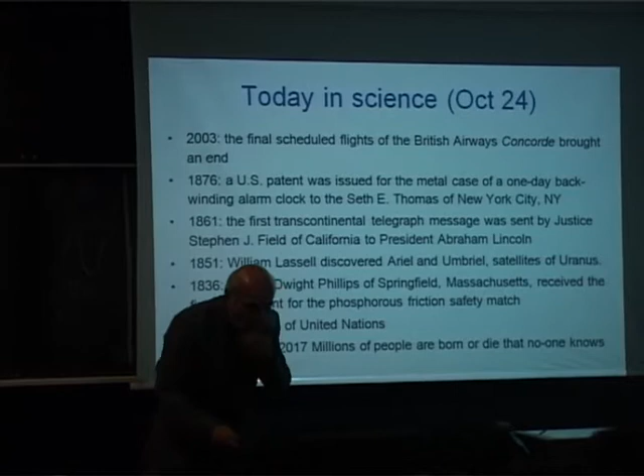So with that, I always would like to bring in a perspective toward any given lecture. And I am reviewing today's history in science, starting from 1945. Today is the day that the United Nations was founded in San Francisco. Then in 1949, it was moved to New York City.

In 1836, you all look at the match, you just make a friction and the light would come in. But you know that fire has been the biggest invention of the human being. And finally, in 1836, a patent was given for a new match. So what you see is millions of years of history behind something so simple. That is the heart of science. Once you understand everything so simple that you can explain it to a 5-year-old, then that is science.

In 1851, two of the satellites of Uranus were discovered, and they were named Ariel and Umbriel. Do you know the origin of these names? They come from Shakespearean characters, Ariel and Umbriel.

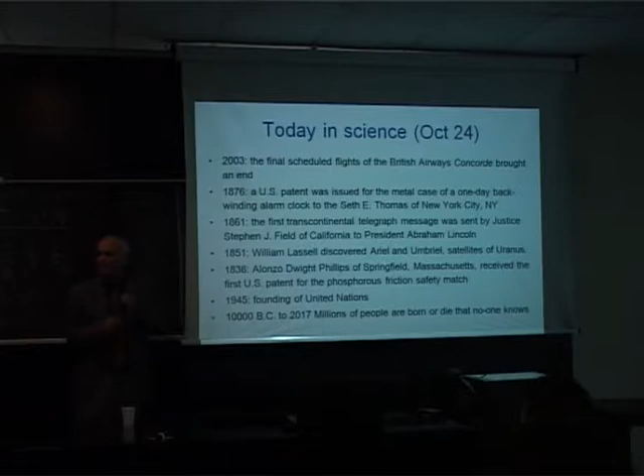Having said all of that, to me the most important factor is the last item. Today, like any other day, is a day that millions of people have died and been born, and nobody knows about it. As engineers, it is our responsibility to be worried about these people. History is the life of these people — this is not history, these are only some highlights of the history. So, everything that we are doing as environmentalists, we are trying to improve our life a little bit better. Many of us are never going to be recognized. That's fine. We are part of millions of people.

Okay, so with that I'm going to now jump into the science. There is a terminology known as urban heat island. A heat island is given to cities because downtown areas are warmer than suburban areas. You all know that during the summer, most people go on vacation in a rural area because it's typically in the mountains, a better climate. So urban heat islands, which are typically higher temperatures, have consequences: as the temperature increases, the demand for air conditioning in commercial buildings and some new residential buildings increases.

As an example, in Southern California, in the Los Angeles Department of Water and Power, the demand for electricity increases from 10 gigawatts to about 16 gigawatts for an interval of 10 degrees higher in temperature.

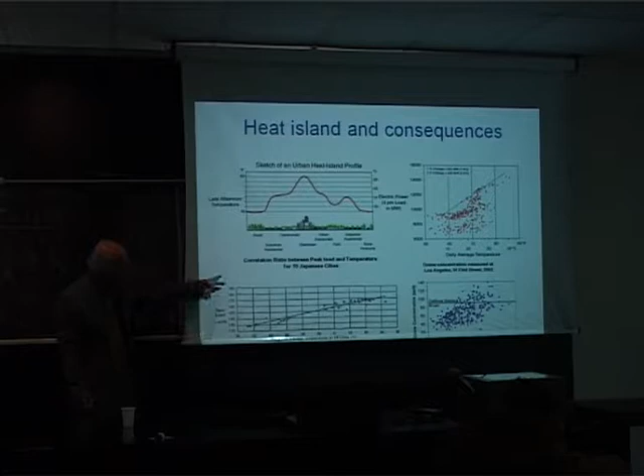Man-made conditions have created a need for air conditioning. Air conditioning costs money and environmental health, contributing to global warming, and there are ways we can avoid some of that. For example, in the Tokyo area, for every degree higher urban temperature, you need an additional 5 gigawatts of power. A gigawatt is 1 billion watts, and each gigawatt of power costs around $2 billion. So each degree Celsius increase in temperature costs an investment of $10 billion.

It's a lot of money. In addition, as the temperature increases, the air quality decreases. The plot on the lower right shows the concentration of smog ozone. When the temperature is around 25 degrees, the ozone concentration is below the California standard requirement, but once temperature increases from 25 to 35, basically all days become smoggy.

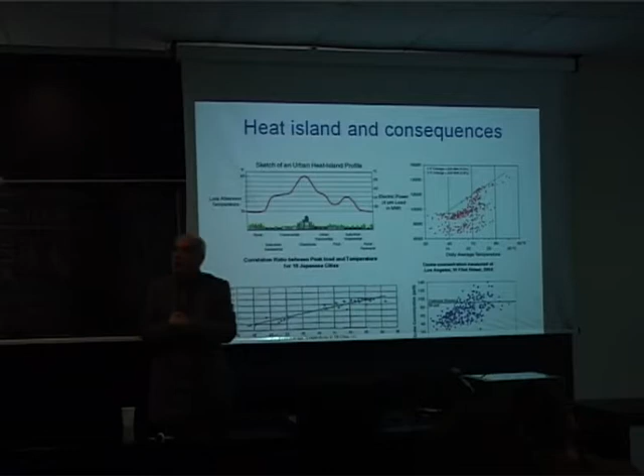So now we're talking about a heat island, which is a man-made effect that causes additional energy use, urban air quality issues, and if buildings aren't conditioned, health and comfort issues for citizens. So what is a heat island? Looking at an aerial photo of most metropolitan areas, you see two dominant surfaces: roofs and pavements.

Roofs, pavements - what is a roof? It's a man-made factor. What is a pavement? It's a man-made structure. So we can manage these things properly because we build and maintain them regularly. If we do it correctly, it would improve our environmental condition. And by the way, this is the case basically everywhere you go around the world.

Now here is another factor. This is August 2003 - a heat storm came to Europe. Some of you may not be old enough to remember that. Italy and France were the major victims of this heat wave. Over 50,000 people had an early death. You know, everybody is born one day and dies another day - statistics are perfect, there's no question on that. But they died prematurely; the time was not there for them to die.

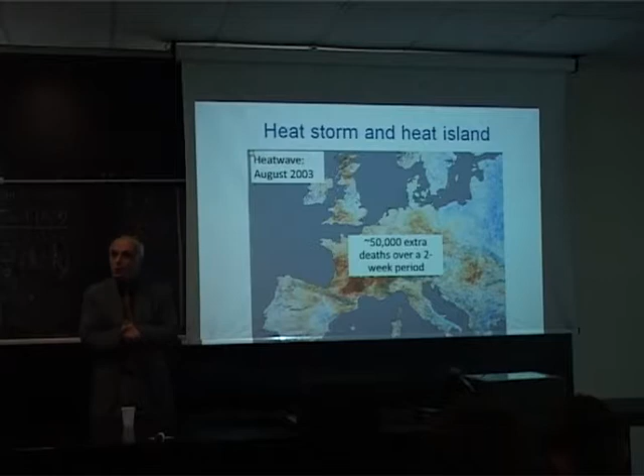They died because of the heat storm. Now, the value of human life matters - it doesn't matter whether that person is living in Europe or living in Africa. So improving the living conditions of humans is very important to us.

So here is how the process works. Solutions for heat island mitigation are typically cooler roofs and urban vegetation. A cooler roof would reduce air conditioning energy use. Lower air conditioning would require less power. Less power would require less fuel to be burned. Less fuel burned means fewer emissions, so air quality would be better.

Now, if a city or neighborhood has plenty of cool roofs, plenty of vegetation, plenty of cool pavements, the entire community is going to be cooler. So if your house happens to be in a cooler community, it would require less air conditioning. On top of that, with a lower ambient temperature, the data show the air quality can improve significantly.

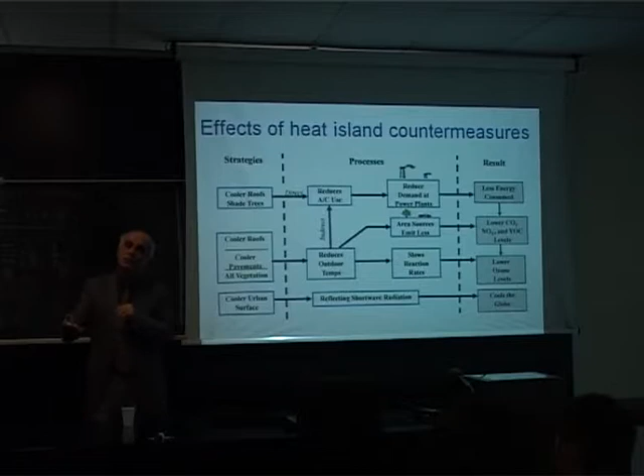So you can define any color you want, with the visible color characteristics you want, but make it 100% reflective in the near infrared. For example, if you want a jet black surface with a reflectivity of 0 in the visible range, you'd develop a material with reflectivity of 0 in visible, 100% in near infrared. On average, that jet black surface would have a reflectivity of 50%. So is such a thing possible? The answer is yes.

Here is an example of a standard brown and a cool brown that's designed to be cool. If you look at the spectral reflectance on the lower right-hand side, you'll find that in the visible range they are identical.

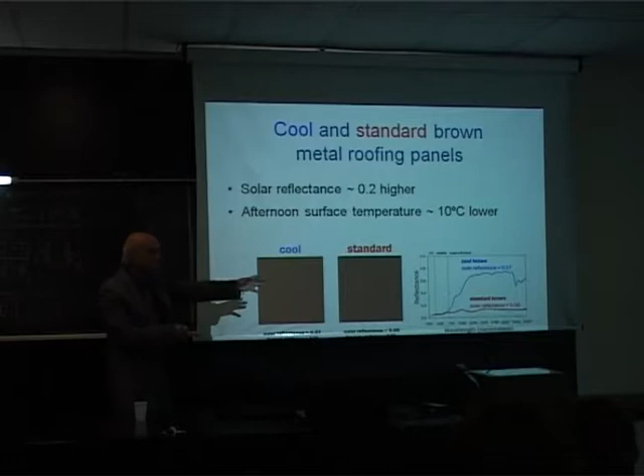Then in the near infrared, you would find out that the cool brown has a reflectivity increasing all the way to 70%, while a standard brown has a reflectivity around 10%. So if you put these in the summer, on the hottest summer day, this surface is 10 degrees cooler than that.

And if you ask people which one is what, without touching it, they would not be able to tell. Actually, there is a true story about this.

I was demonstrating some of this in the U.S. House of Congress. I had a booth demonstrating some of these cool materials, and I had an infrared sensor that would target this and show the temperature. The battery of my infrared sensor died, and I didn't have time to go and get a new battery, and I was not well prepared to have a spare battery.

So many of the House of Representative members that came, the only way for them to understand whether this is cool or hot was to touch it. When they touched it, some of them burned their hand. So it is called a burning impression. Some of the House of Representatives who are supporters of the technology still use that terminology.

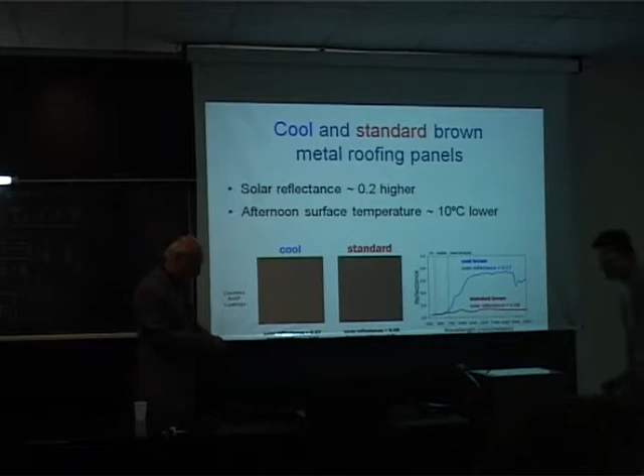You're looking for the, yes. Thank you. Wonderful. So now let us go. This one? How does it go? No. Okay, good.

First option, to be absorbed. Second option, to be reflected. Third option, nothing happened to it, go to the next layer. The same thing happens at the next layer: absorbed, reflected, or nothing happens to it.

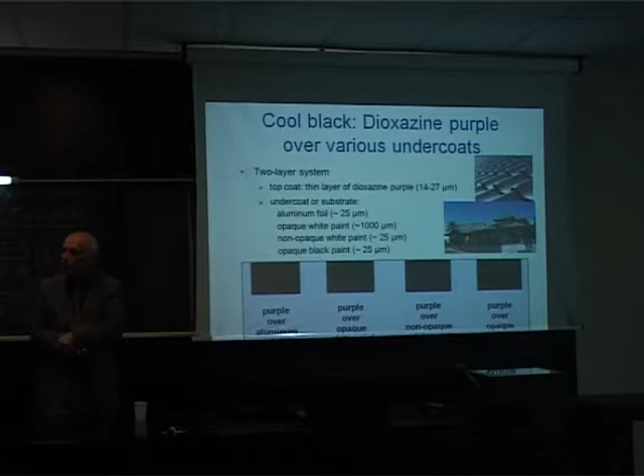And again, as far as the eyes are concerned, they are exactly the same. Now look at their spectral properties. Eyes say that they are exactly the same. But when you look at the properties in the near infrared, you find out that the materials on the metallic and white background have a much higher reflectivity, almost up to 90%.

So when you integrate it all, you find out that the jet black standard has a reflectivity of 5%, but the reflectivity of the engineering material is about over 40%. Remember that a few minutes ago I said you can develop a jet black material with a reflectivity of about 50%. You are already 80% of the way there with some simple ingenuity.

So the question is, doing things at the lab is good, it brings a level of satisfaction, but you get a lot more satisfaction if you see the products in the market. So from the very beginning, in my group, both at Lawrence Berkeley Lab and at Concordia, I have been working directly with industrial partners. Our technology was integrated with their technology. We had a bit of technical, academic background; they had a lot of application background. Together, we made a perfect fit, and products came to the market.

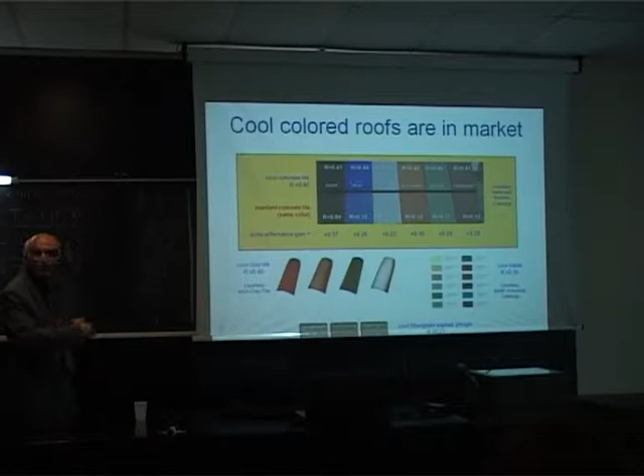So here is an example of standard coatings versus cool colored coatings. A lot of concrete tiles change over time. Oh, thank you, that makes a big difference.

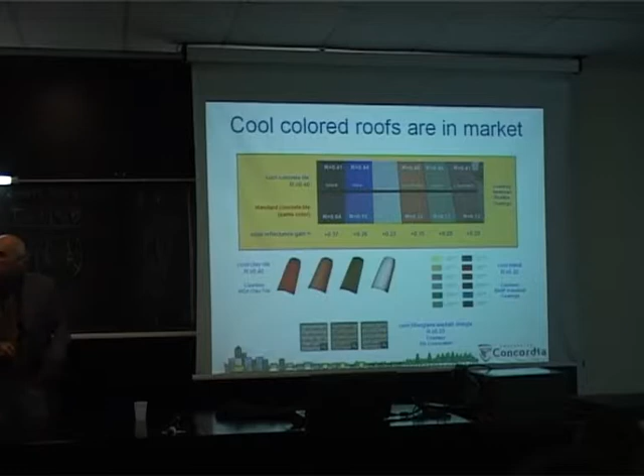So, cool colored materials versus standard coatings: cool colored tiles approaching a reflectivity of about 75%, cool colored metal roofings approaching a very, very high reflectivity, and also fiberglass asphalt shingles, cool colored. These products are available in the market.

Now, newer products are being developed at the lab, and one of those products is what we call latent heat cool white. Basically, this is a sponge rock-like roofing that works very well when there is high pouring of rain in a short time. So flood is a major issue.

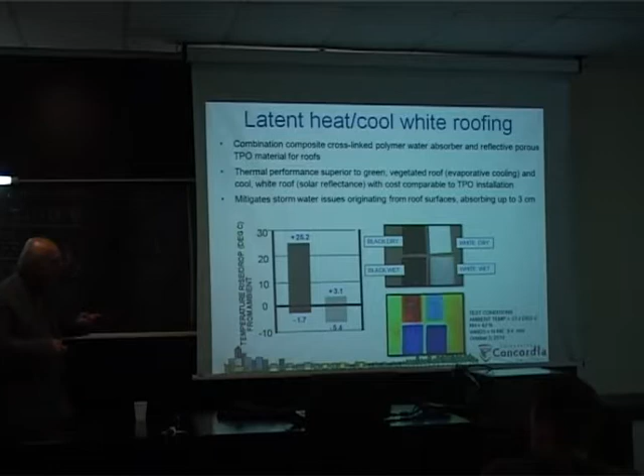In the old days, when the land was not engineered, this water would be absorbed by the ground. But in a development, water from the pavements and roofs runs into the city, and if the rainstorm is very severe, it would cause flood. So this particular material has the capability of absorbing this water, and as a result would reduce or regulate the flow of water from the roof.

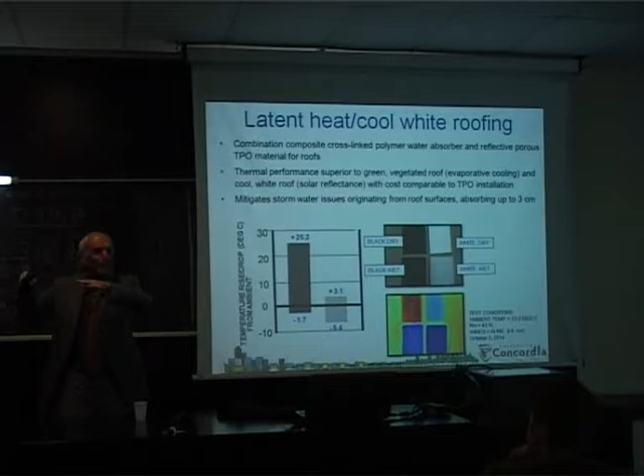But once the water is absorbed on the roof, it would keep the roof cool for a few more days. So this type of product is very useful for tropical ranges.

Here is this product when it is dry. When it becomes wet, this is the thickness of the product, and this is the amount of water that it has absorbed on its roof. Of course, you have to make sure that the structure can hold that additional weight of the water. Otherwise, you are trying to solve the water problem, and the entire roof would collapse. So it is an integrated problem.

Another technology that is again very simple is when you want to have a choice of color and you do not want to invest a lot of material. Another class of material that we are calling directional reflectivity. This is not retroreflective, it is directional reflective.

Consider a roof, a slope roof. People would like to see the color of their choice when they are walking on the streets, but the sun is up there and sees the roof in a different way. So if I see the color that I want, but the sun sees white, I have achieved my objective. Here is the way that this material has been engineered.

Here is an example of that. This material looked at from the ground, and this material looked at by the sun. The reflectivity in this direction is 60%, and the reflectivity in this direction is 20%.

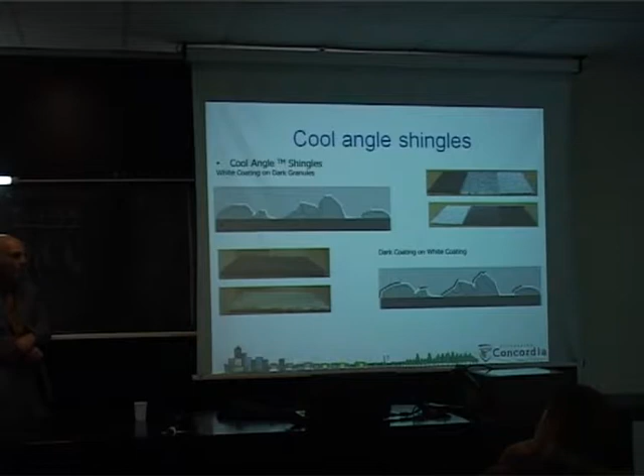So how do you do that? For a granulated surface, you brush the surface in one direction in the color of your choice, or white color. You get your answer immediately, almost at no cost.

So there are ways to engineer this material, not necessarily very expensively. And of course, retroreflective materials, which particularly lend themselves to environments with heavy urban settings.

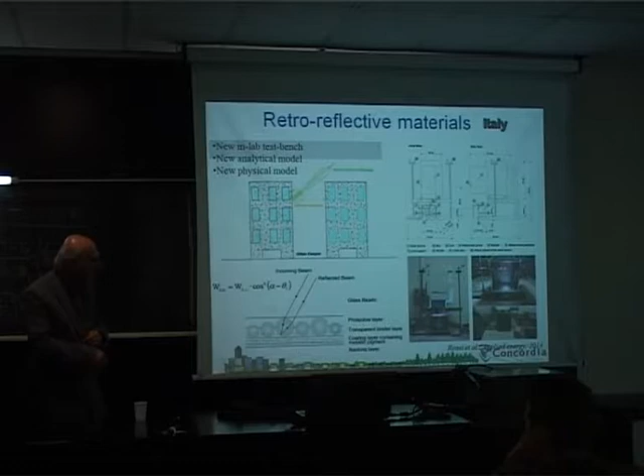When the radiation of the sun is incident on the wall, you do not want that radiation to be reflected through the window of another person. So it would reflect the radiation in the direction that it comes from. In most cases, these materials can be developed by putting hollow spheres into the coating on the top layer, which would reflect the radiation after three bounces in the direction it is coming from.

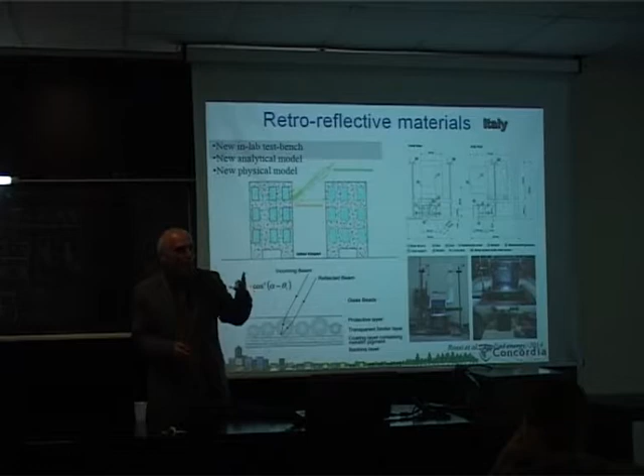These retroreflective materials are the same as when you are driving at night on the freeways, on the autobahns. Their light would come back in the direction of the light of your car.

These materials, when not fluorescent, have a standard reflectance of about 20%. Now, if you make them cool, their reflectance increases from 20% to 40%. Now, if you make them fluorescent, some of the light that is absorbed in the visible range would be emitted in the near infrared range at over 60% reflectance.

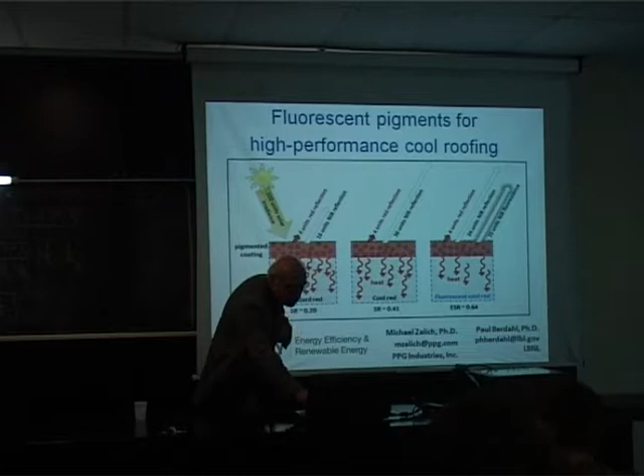Now, when you start something, before you know it, you can see that you can apply your knowledge into an adjacent environment. As an example, a lot of surfaces that we have—you don't have to go a long way, just look around the buildings here. They get dark or black over time.

Windows collect dust. The question here is how I can minimize the deposition of particulate matter on surfaces.

This is called a class of self-cleaning material. It is applied on the roof, applied in an interior shade, applied on a wall, and applied on a car on one side.

Now, does this save energy? I don't know, but let us look at this thing.

In most high-rise buildings, the windows have to be cleaned every 3 to 6 months. It costs typically in the order of $20 per square meter to clean those windows.

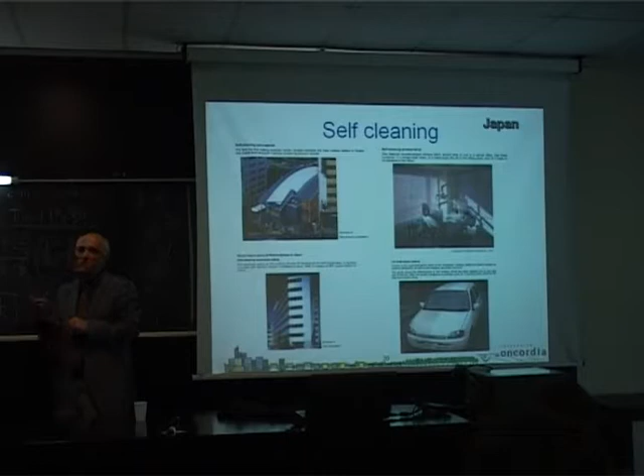Here is another application of this material, being produced or tested by TOTO in Japan. By the way, the Japanese are really leading the application of titanium dioxide in the world. Class A materials are all those tiles treated with titanium dioxide. Class B materials are not treated at all. Again, it tells the story by itself.

Now, the roof typically in an urban setting makes about 25% of the surface area. Pavements in a typical city make about 40% of the urban area. So addressing urban heat islands without mentioning pavements means you have not really achieved the fullest potential.

So the pavements, and understanding how to implement cool pavement technologies, is very important. Even though pavements in most cases are a very simple material, it would be very difficult to implement cool pavements because of different ownership and different applications.

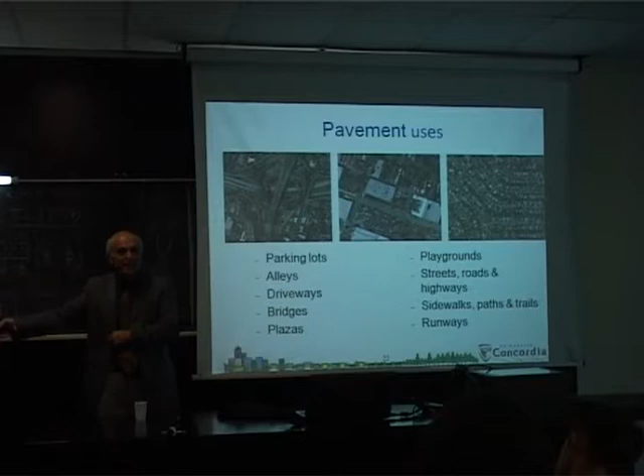But the point here is that addressing all these different materials with different ownership, while the asphalt industry is fighting against you, is not very easy. You have to work with them.

This is called hot mix. Then you spread it on the ground, roll it in, and let it cool down. That's one. The other technology, called chip seal technology, is made out of 2 trucks and a roller.

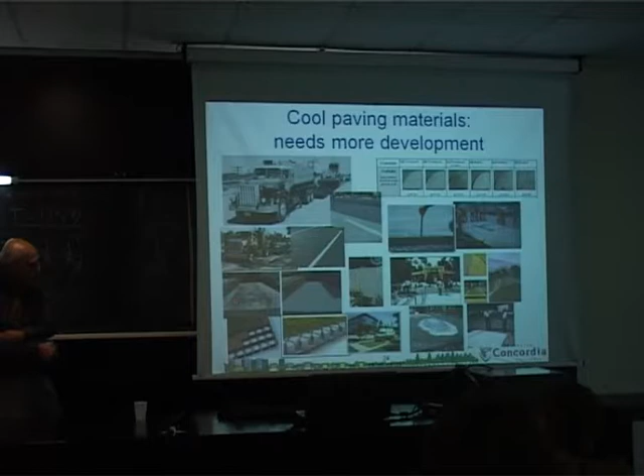Another technology being used is the development of coatings. This is a driveway, the kind typically used in warehouses, where trucks come in and load cargo. Over time, this becomes dirty because of leakage of oil from the trucks, so they resurface it every now and then.

There are products already available for this resurfacing with reflectivity as much as 50%. This has a reflectivity of 50% at a very minimal incremental cost, and in most cases, no incremental cost at all.

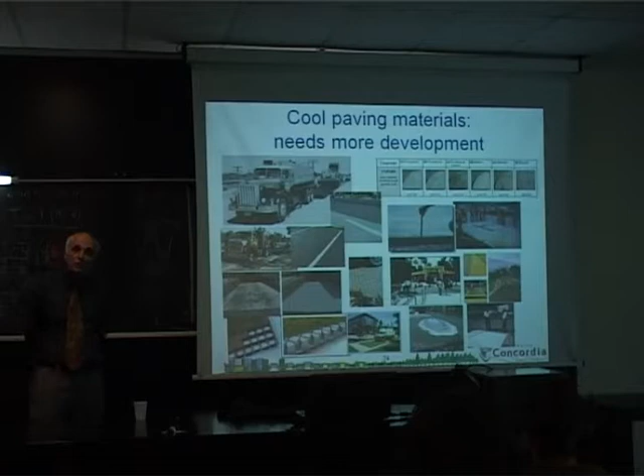In areas with substantial rain, rather than having a solid layer of asphalt, you would have something known as grasscrete. These are lattices of concrete that you let grass grow on. These technologies are being used throughout the world in urban areas—Japan, Singapore, I have also seen some in Italy here and there. There is also porous asphalt, designed to manage flooding in cities.

Now here is the interesting thing about asphalt: the information is coming gradually. There has been a study done looking at the lighting level, the intensity of the lighting, and hence the observation of the pedestrian on these asphalts.

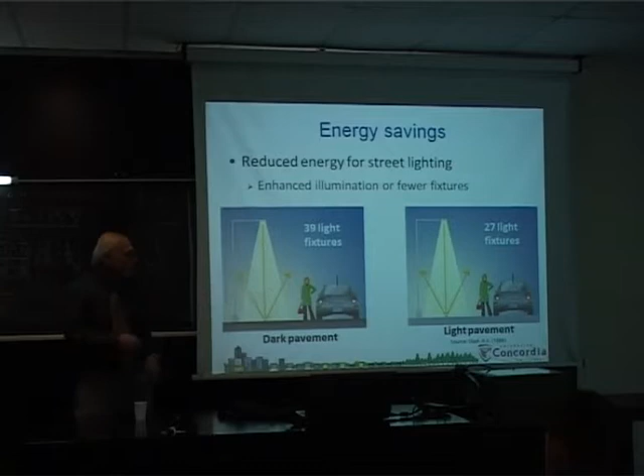One of them is in a dark color, the other in a light pavement. They found that in order to achieve the same level of luminance in the environment, they can have 27 fixtures per mile rather than 39 fixtures per mile. So you have exactly the same level of illumination, but with 12 fewer out of 39 or 40 fixtures—about 30% less lighting.

The source is Stark, 1986—as old as that.

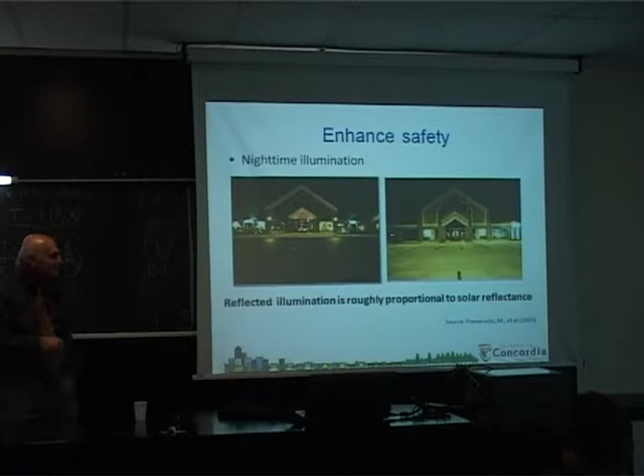Now here is the same pavement measured under the same lighting after being coated in light-colored asphalt. If you are a pedestrian, which one would make you feel safer to walk on—this one or this one? Obviously, if you are walking on the dark one, there is a higher chance of having an accident with an incoming car. On the light one, you would be a lot more visible. So that issue also has to be integrated into the design and use of asphalt.

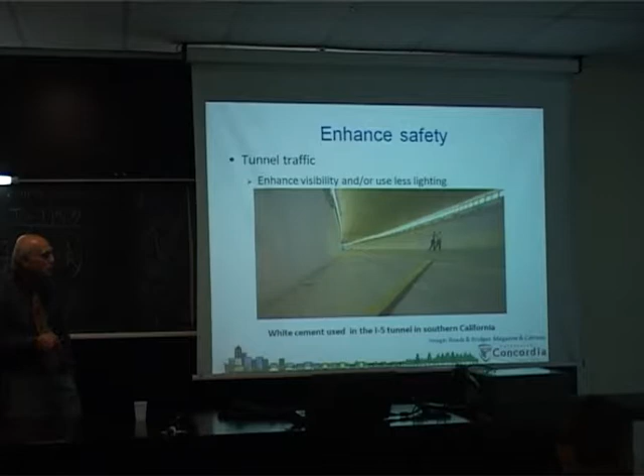Tunnels are all artificially lit. In the United States, most tunnels built as of 50 or 60 years ago are light colored. Unfortunately, I do not know how or why the roof is not light colored, but all their walls and paved surfaces are in lighter color. I have seen many tunnels here and in the rest of Europe that do not follow this simple approach—more lights in a dark environment versus less light with the same illumination in the same environment.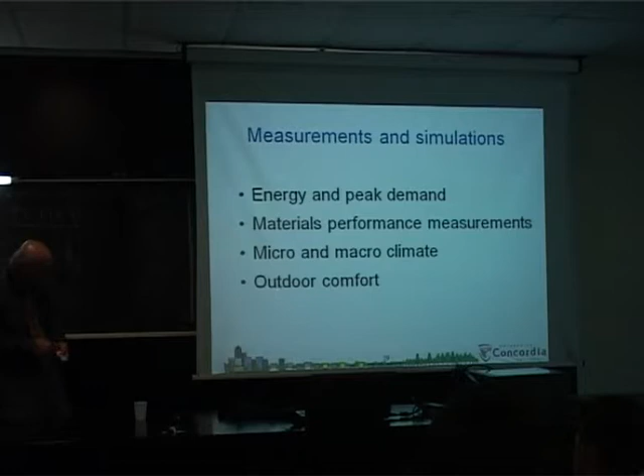A lot of work has been going on, and my colleagues in Italy, France, Greece, Japan, Singapore, India, South Africa, Mexico, Brazil—they are all around the world pushing this technology as it applies in their own communities.

Here is an example of a test that we did. This is very important to policymakers: you take a regular cap sheet roof, monitor its performance, then put a coating on it and continue monitoring. This slide shows when we have half-coated the surface. As you see, the coated part is very cool, the uncoated part is hot, and the seams that are black are the hottest.

When you measure the air conditioning performance of the same building before and after, the weather also changes, so you have to normalize the conditions to compare before and after. When you do that, you find that for a typical single-story building, you save anywhere between 10 to 20% of air conditioning energy use. People immediately understand and absorb that. A 10% savings is typically on the order of about $1 per square meter per year. A roof lasting 20 years—that's $20 per square meter, which is typically about the cost of the roof itself.

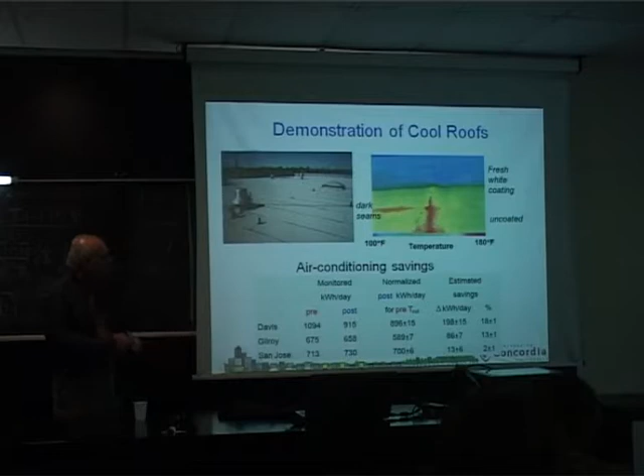So people understand that. When such information becomes available, rule-making bodies such as California Title 24, the European Energy Conservation Code, and the International Energy Conservation Code start using these technologies as requirements for the design of buildings.

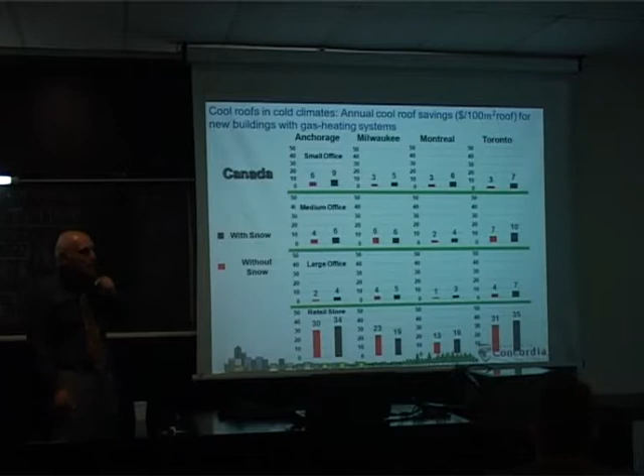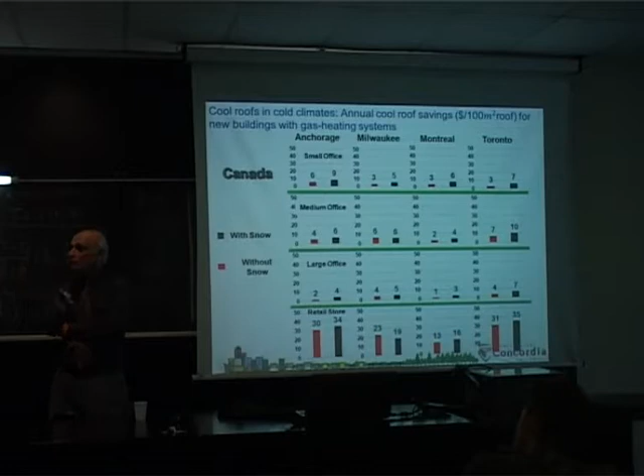This is something a lot of people question, and it's actually a myth. A lot of uneducated people think that if cool roofs are good during the summer, then hot roofs should be good during the winter. But let's think about the difference between summer and winter. When you're talking about winter, in most climates that means no sun—so a dark roof and a white roof would perform the same when there is no sun.

How do you see that? Take it during the night. Take two samples when there is no light, one white and one black. Look at them in the pure dark. You would not see any difference because there is no sun.

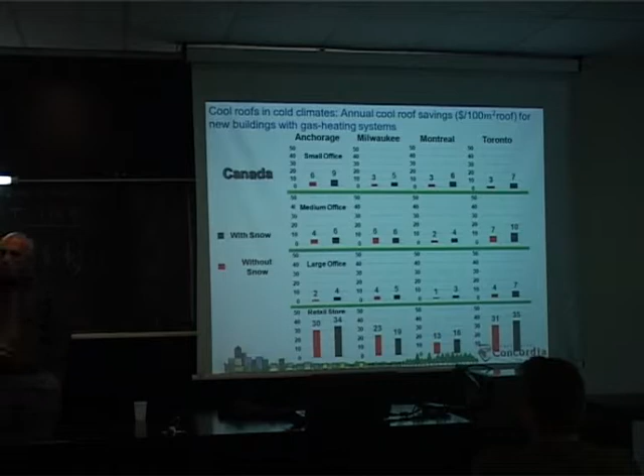That is the situation that we, even though it is so observable, had to do a lot of analysis to show people. In 4 cold climates—Anchorage, Milwaukee, Montreal, and Toronto—we compared the performance of a cool roof on an air conditioned building, and there is a net savings in all those cold climates. This didn't even account for the impact of snow accumulating on the roof. If snow accumulates, it doesn't matter whether it's black or white underneath—they perform the same. So once you account for that, the savings are even higher.

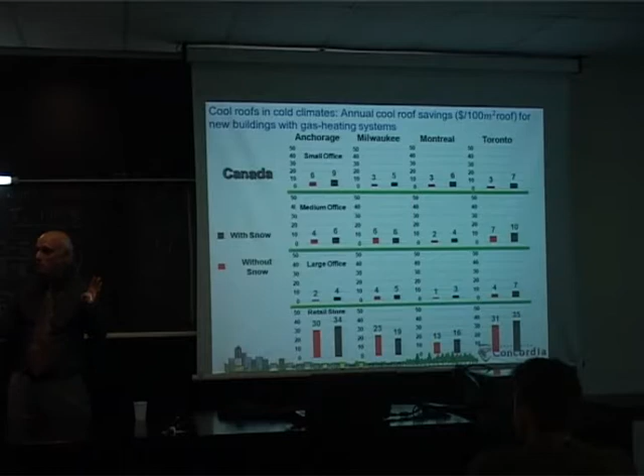So here is the first rule of thumb: anywhere that air conditioning is needed during the summer, for most applications, having a cool roof would save you money. There are exceptions, but those exceptions are very, very few.

Now I'm going to go a little faster so I'm not boring you too much. The impact on a particular building is very easy to demonstrate—you can put a sample, change its color, and with an infrared gun immediately see the temperature difference. But looking at air quality and climate, which happens at a much larger scale, it is very hard to design an experiment to do that. It is costly, and the environmental variables are so many that you would never find two similar conditions to compare before and after.

For that, you develop models that can account for those factors, such as meteorological models. By changing the reflectivity of surfaces, you increase the reflected radiation, reduce the surface temperature, and then reduce the ambient temperature. The same with vegetation—through evapotranspiration it cools the air temperature, increases surface roughness, absorbs some air pollutants, but also emits its own emissions. When you put all of these things together, it's a highly complicated factor.

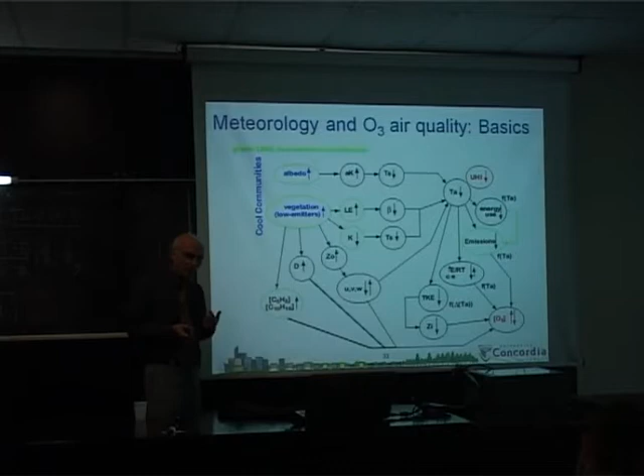So we have been doing research in this area for the last 40 years. We started—first of all, we are not climatologists. We use the models and apply them to our conditions. But we are also smart enough that if a model is not sufficient for what we want to do, we make slight modifications to it. That has been the focus of our research over the last 40 years.

The models we started with were the Colorado State University mesoscale model. Then we went to MM5, and after about 10 years with MM5, we moved to WRF, the Weather Research and Forecasting Model. Now most people around the world use these models.

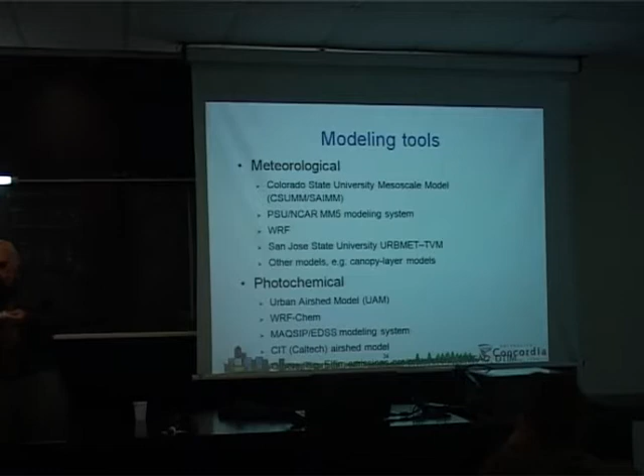For photochemical models, we had quite a few, but right now there are 2 state-of-the-art models used. Most people look at WRF-Chem, but some also use the model that Caltech uses. Professor Seinfeld at Caltech developed CIT, and he's the only user, but since he is an authority in this field, he uses his model and only his model to talk to others. If you are talking to an authority, you have to come to terms with that.

That's the model. So the principles behind these models are very simple. This is actually one of my favorite slides. As engineers, we do not deal with many principles—we only have something like 5 principles that we apply basically to everything. One of those is conservation principles.

So you have conservation of mass as the first one, conservation of energy, conservation of momentum, conservation of water mass, and conservation of energy on the surface. You would say you have a finite number of grids over a domain, divide it into those regions, and apply these conservation equations in a finite difference scheme to solve them.

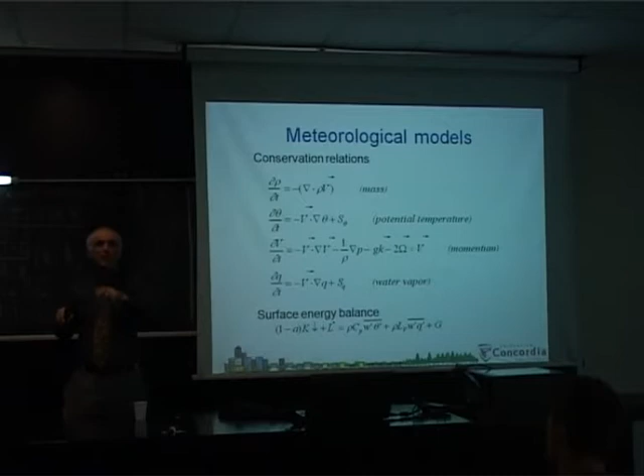Do you understand what a finite difference scheme is? How many of you understand finite difference? One, two—okay, so for you there's a problem, you should go on. So divide this group into 3 groups, and you tell them what finite difference is.

Now here is the point: you have to solve a series of 200 partial differential equations simultaneously, and stability of your solutions is a major issue. Typically, even with supercomputers, to model 1 hour of actual weather you need at minimum 30 minutes of simulation. So if you want to run a simulation for 1 year, it would take your supercomputer half a year to do that—who can afford that? So the way you do this kind of simulation is you only simulate a few days in a month, or a few hot days or cold days, in order to document your principles.

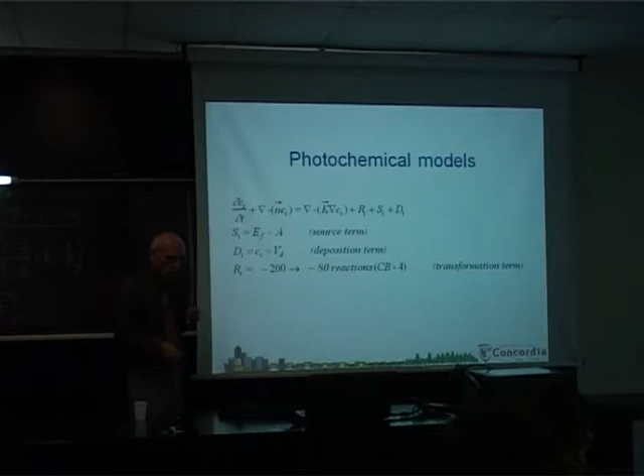Here is an example of such analysis that we have done for a few days. We planted 11 million trees in the Los Angeles basin, and we simulated the temperature reduction as much as 3.5 degrees Celsius, but on average about 2 degrees Celsius throughout the entire Los Angeles.

We did simulations on air quality and found out that not only does the temperature change, but the air quality improves. This is actually very interesting: note that in some areas the air quality has worsened—these are areas, either overseas or mountain areas, that nobody lives in. So when you're not doing anything with the surfaces, all those pollutants that haven't been able to react have an opportunity to react somewhere that nobody is, which is okay. So understanding this concept and passing it to air quality measures is important.

Now here is another thing: you always find a lot of people in your research trying to disprove you, which is okay. As an example, an article has shown up in Los Angeles by a study showing cool roofs actually worsen the air quality. Now, you have so many things to do, but there's no way you can let this go. You have to prepare an anti-article saying this person said this, but this is wrong, this is wrong, this is wrong.

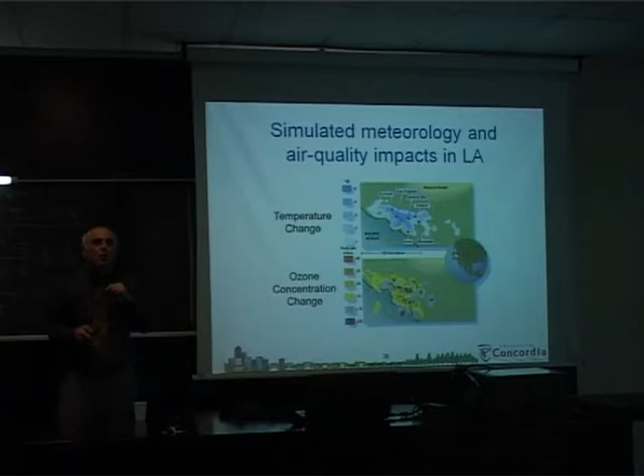How many of you have read two books? The Philosophy of Poverty—any of you? Philosophy of Poverty.

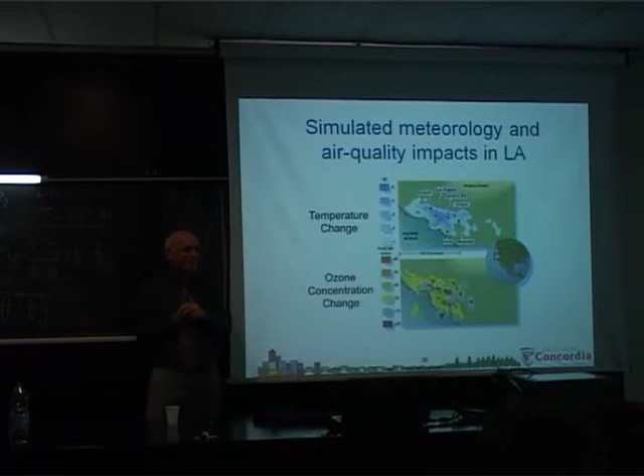During the 19th century, there was a French leader trying to describe why poverty exists. He wrote a book which took him, based on his own account, about 20 years to write. Then a book came out 3 months later titled Poverty of Philosophy—Philosophy of Poverty, Poverty of Philosophy. Who has read that book? Do you know who wrote it? Karl Marx. He analyzed every sentence that Proudhon mentioned in Philosophy of Poverty and showed that Mr. Proudhon, or Professor Proudhon, doesn't know anything—doesn't know what he's saying, talking from two sides of his mouth based on what he wants to say. By the way, the sales of Philosophy of Poverty had been, throughout his life, in the order of about 50,000. The sales of Poverty of Philosophy had been in the order of 50 million.

So people always come with these things, and we have no choice, as environmentalists trying to have an effect on the lives of tens of millions of people who are born and die every day, to stay silent.

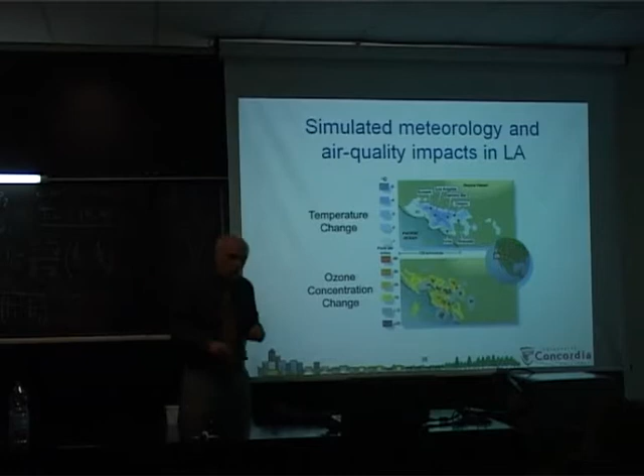Now, in an urban climate model, I'm going to go through these slides very fast. Here is what you would do: you have a building, these buildings make a community, these communities make a city, this city is part of a region. Air quality or weather forecasting models deal with a domain on the order of 1,000 kilometers by 1,000 kilometers. Now if you break down this domain of 1,000 by 1,000 kilometers into 1 kilometer by 1 kilometer cells, the number of cells to deal with is huge, so your computational effort would be very, very high.

So the way you do this type of analysis is through nested simulations, so that the grids in the outer range are on the order of 50 kilometers. Then you bring in the grids at this layer on the order of about 1 to 2 kilometers. Then you have another subgrid on the order of 300 meters to 1 kilometer. Trying to understand how to model this and have them interact with each other, most of the people who developed WRF have dealt with this.

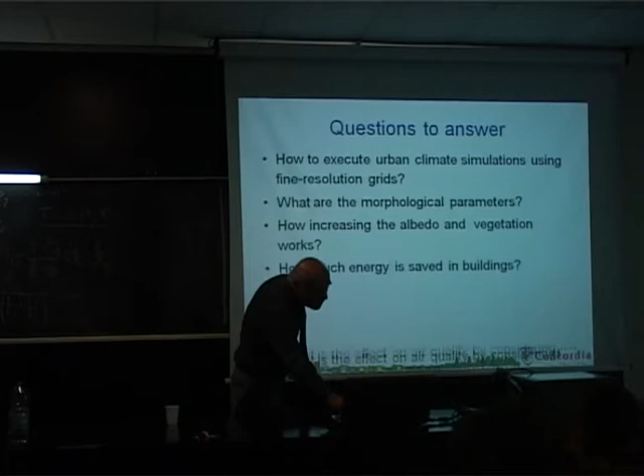So all of this said, there are two ways to understand and answer questions. Number one is to be a listener, to find out what the practical question is that people are asking, and provide a tool to answer that question. Number two is: this is what I have, I have a hammer, everything you show me is a nail, so I'm going to apply this hammer on every question that you have. This type of approach would not work well with the environment and the policymakers.

You need to understand how to design a process to answer specific questions. For instance, how increasing the albedo and vegetation would impact the urban setting, or how much energy is saved in buildings. Each of these would have a different set of simulation and analysis tools. So there is not one size fits all. Therefore, you have to have a comprehensive understanding and apply it properly.

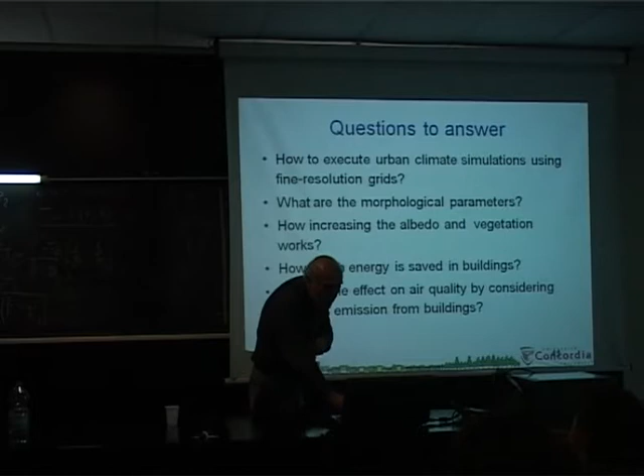Now, the tools that we have, as I told you, for simulation is WRF, looking at the grid sizes with the nesting, understanding how to integrate the canopy layer model or the urban area into this, and finally how to account for the chemistry and air quality.

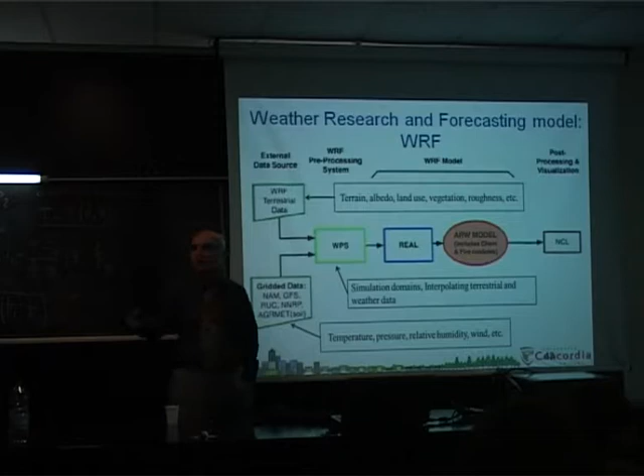WRF is a very, very sophisticated model, and we basically do little with the WRF model itself. We spend most of our time understanding how to prepare input for those models and how to analyze their output. In order to know the input and output, you have to know the details of the model itself. So even though we are not applying it the way a climatologist applies it, as a practitioner we have to be as good.

Now, the physical models that WRF is using are being developed by climatologists. These climatologists develop things on a larger scale, such as formation of a cloud based on empirical relationships at the scale of 50 kilometers. Now, if you have an urban setting at the scale of 300 meters, you change the reflectivity of one grid but do not change the reflectivity of the next grid. If you apply this model, you would find that on this block you have cloud, and on the block next to it you do not.

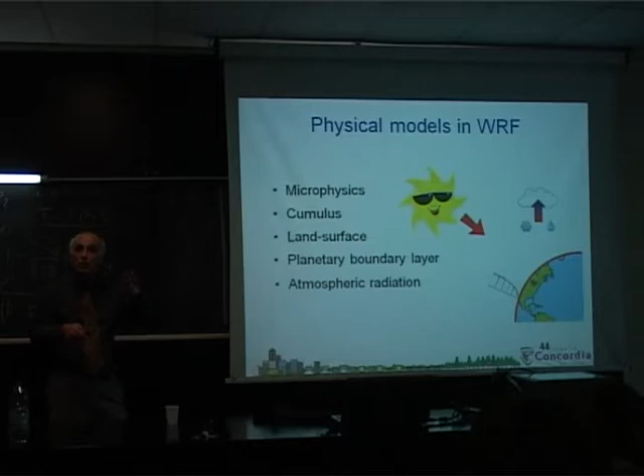Does such a thing exist in reality? The answer is no. So wise application of these models, knowing how to apply them and where to apply them in their nesting approach, is very important.

So here are some results where with a multi-layer model and a slab model we have looked at the performance. This is Montreal Island, and this is the island of Île-des-Sœurs, where my wife and I lived for about 5 or 6 years. When you apply a different layer of modeling, rather than having a coarse radiation budget or heat flux budget, you get this detailed heat flux budget, which is a lot closer to reality.

Then understanding how to account for the effect of the urban settings, which is the buildings, the rows, and the height of the buildings, you have three-dimensional and two-dimensional models that you have to account for. Here are simulations done for 3 representative days for each month, which are then interpolated to understand the effect throughout the city.

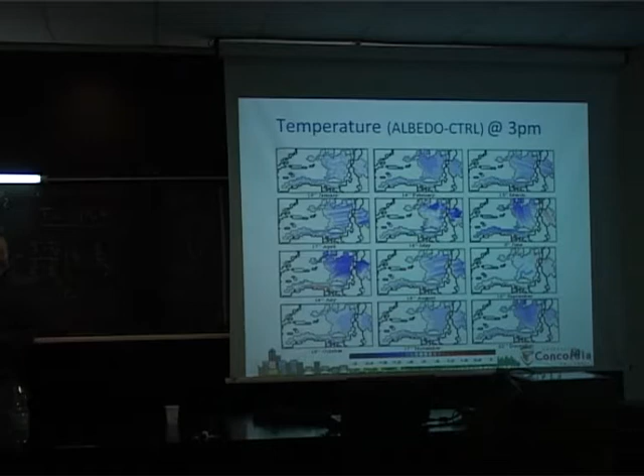Now, here is the important thing: application of cool roofs and cool pavements. Note that the impact is clear in the months of May, June, July, and a little bit of August. The rest of the months, there is no effect, which is expected because there is not much sun to begin with. So cool roofs do not have a negative impact in the winter season. The effect of increasing the albedo in terms of reducing the ambient temperature is also shown.

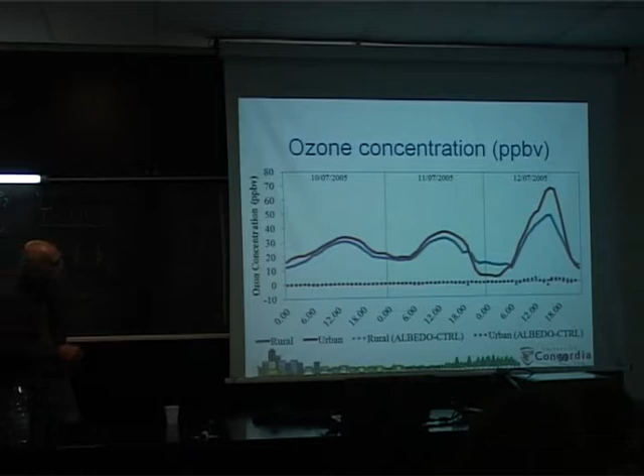We can analyze that to see how much comfort there is, and the effect on air quality. There are 4 simulations here: one is ozone concentration in the urban area, one is ozone concentration in the rural area, one is ozone concentration when you apply white roofs, light roofs, and white pavement in the urban area, but it's only shown as a difference with respect to the baseline. So if you add this difference to the baseline, you get that new curve. And finally, the same is done for the rural area.

This is the same analysis in terms of understanding particulate matter. This is actually, for some of you who may be interested, one of the biggest health issues. The human body is very, very sensitive to the size of these particulate matters.

Any particulate larger than 10 microns is filtered out by our nose system. So you would find during the summer when you're cleaning your nose that there's a lot of dark material in there—that's what's being filtered out. Any material below 1 micron would go through our system and come back.

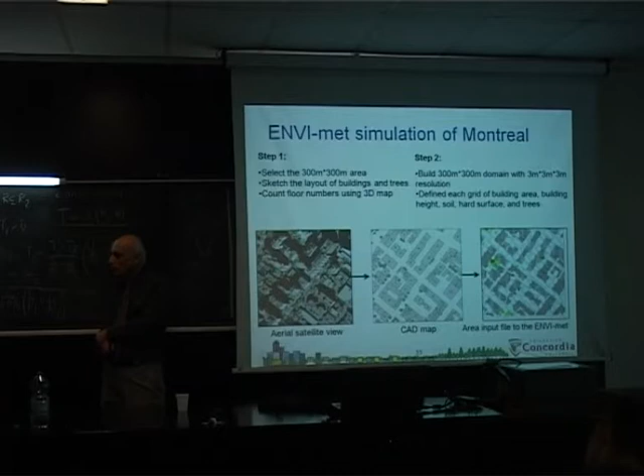So you would find a lot of simulations, such as: if I plant trees along this street, what would be the effect on pedestrian comfort? If I increase the reflectivity of roofs or pavements, what would be the effect? Such examples are shown with this type of simulation.

Now I'm changing gears in terms of the science to the last point, which is: cool surfaces also cool the globe. I mentioned that if you have a cool roof, that directly reduces your roof temperature and reduces your air conditioning use. Now, what happens to that radiation that's reflected from that surface—be it roof, pavement, or a mirror somewhere—has nothing to do with the energy use of the building.

Shortwave radiation from the sun, on a clear day like this, when it comes to the Earth, if it's absorbed by the surface, it becomes heat, or long wave radiation. When the long wave radiation tries to escape the Earth's globe, it faces the CO2 greenhouse effect, and as a result, it's not able to escape very easily. Therefore, it warms up the globe. Shortwave radiation, the same way it came in, would reflect off the Earth's surface.

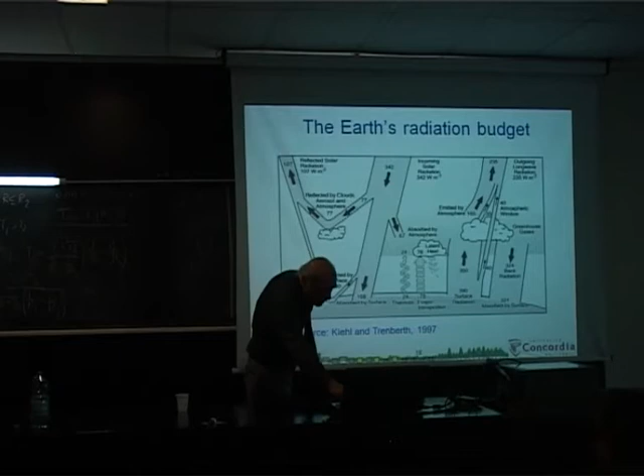We did some simulations which attracted a lot of international attention, by taking the Earth and increasing its reflectivity by a certain amount within plus or minus 20 degrees latitude, or plus or minus 45 degrees latitude. Then we found out how many square meters of land is in between these two and normalized that.

So we found that the temperature of the Earth, for increasing the reflectivity of 1 square meter by 0.01, would reduce by about 3.5 times 10 to the minus 15 Kelvin. Very, very, very, very small amount. But remember, this is per square meter. Now, if you have billions of square meters, they suddenly multiply and the number becomes appreciable.

And even more interesting was that if you increase the reflectivity of the Earth by increasing the reflectivity of 1 square meter by 0.01, that would reduce the air temperature by a certain amount. You can also reduce the atmospheric temperature by taking CO2 from the atmosphere. Then you ask, for the same temperature difference, how much equivalency do I get?

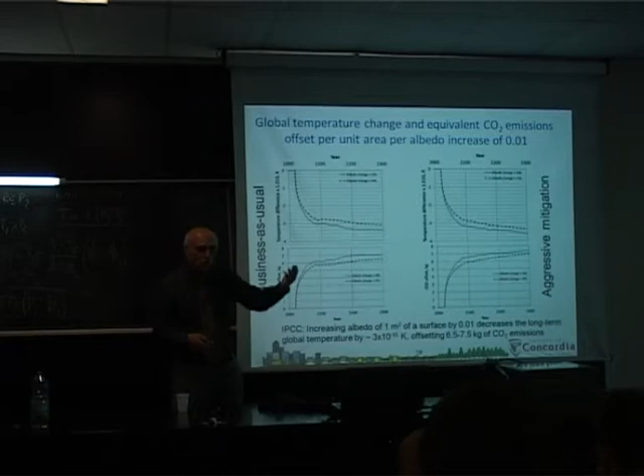If you increase the reflectivity of a surface by 0.01 per meter square, that is equivalent to taking 7 kilograms of CO2 from the atmosphere. So in your own house, if you have a dark roof and you increase its reflectivity by 0.4, that's 40 times more. 40 times 7 is 280 kilograms of CO2 per meter square. If a typical house is 100 meters square, that's 30 tons of CO2 equivalent.

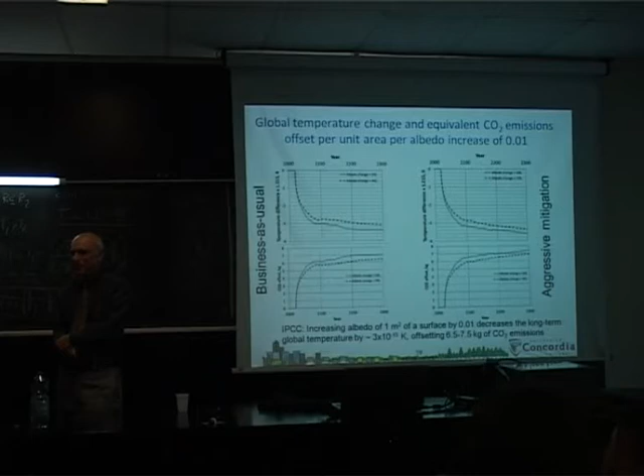So you start thinking about it. Your car puts about 4 tons of CO2 per year. If you change the color of your roof, your house, you would offset 7 years of emissions of your car. Think about it, it's very, very important. These are the things that we can do easily.

You must all know that in 2015, Article 2 of the Paris Accord came to the resolution of trying to limit the increase in temperature to 2 degrees Celsius, or 1.5 degrees Celsius if possible. And of course you all have heard that President Trump has pulled out of the Paris Accord without caring what is going on.

Trying to design and develop programs at such a huge international level is not very simple. One has to really start putting collective efforts together to see how we can do that. And obviously cool roofs and cool pavements play a significant role. The beauty of this technology is that it saves you energy, improves your comfort, improves your air quality.

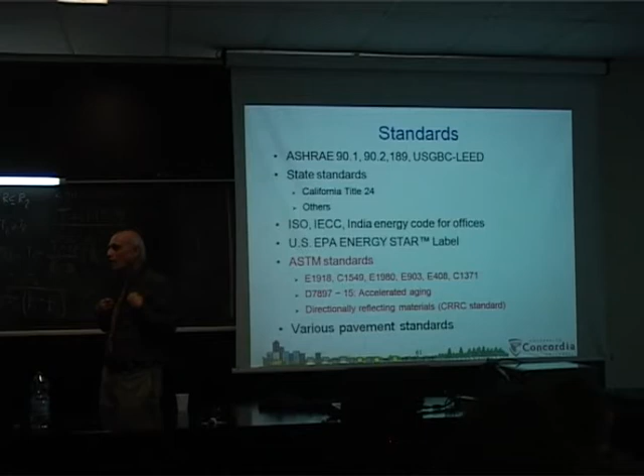So these are our responsibilities as the students of today and leaders of tomorrow. Of course, not each one of us has the feeling, responsibility, and honor to get to that level, but believe it or not, every single one of us has those kind of internal emotions. We all would like to live in a better environment, pass through a better environment. If there is a ghetto versus a nicer neighborhood, we always try to go through the better neighborhood. That is part of us. We always try to improve ourselves. Why shall we not do it now?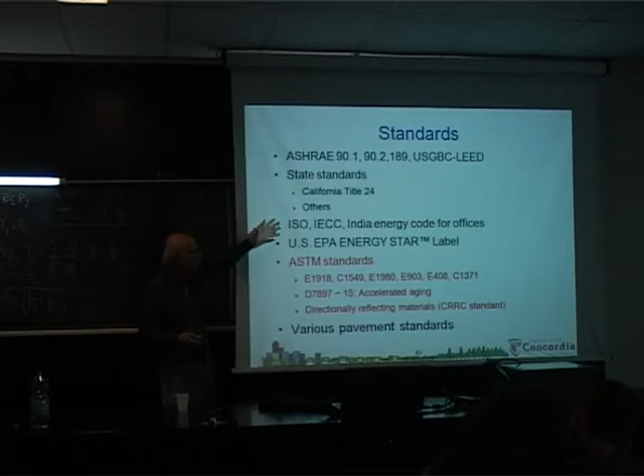So we have been developing various levels of standards at different levels - the state level, international level, and technology level - that I would be talking about, a couple of them, back and forth in here.

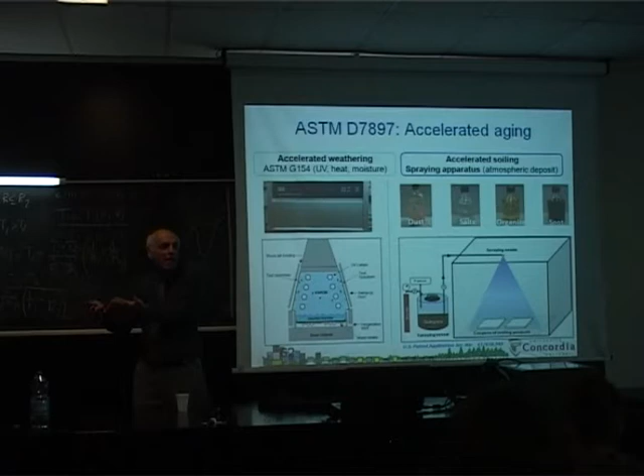Here is an example of a standard that we developed almost 2 years ago. Manufacturers come with this practical question: I have developed this material, and I would think that it does have superior performance properties, but I do not know how it is going to perform in 3 years. How can I improve its performance assessment in 3 years? I cannot afford the time to put this material in the field for 3 years and then find out what my stake is. So you work with the manufacturers and come up with a procedure that would take about 1 week or 3 days that would produce the same result as 3 years. Manufacturers call you their hero because you are asking and answering a practical question that they have. So this is one particular standard that we have developed.

Education is a part of all the demand that we need to do. We have to make sure that we provide the right information. The information has to be so simple that everybody would understand, and also would not dispute it.

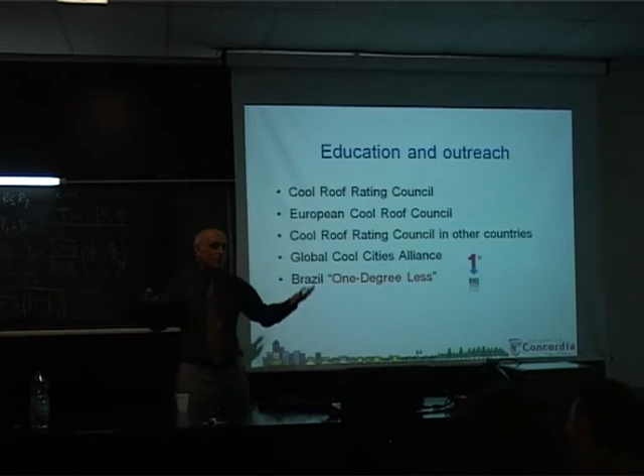Now again, I have to ask you a question: how many of you have read Animal Farm? Wonderful, thank you. The story of Animal Farm is this: a group of animals in a barn are complaining about the farmer, that they do all the work and the farmer gets all the benefit. The donkey does not get enough food, the chicken would not be able to grow enough children because all their eggs are stolen, the horse is doing all the work. So they revolt and throw the farmer out, and during this they find out that they need to coordinate themselves.

A sheep is among a group of animals that do not have a good understanding. So all the directives produced by the pigs are not understood by the sheep. The pigs come with the issue of trying to teach the sheep that all animals are good, but human beings are bad. Now sheep cannot understand that. So the pigs come with the idea of something simple that the sheep can understand.

2 legs bad, 4 legs good. So now the sheep can simply understand what is good, what is bad, and how to communicate with the other. Unfortunately, when we are dealing with a society, we have to go with the lowest denomination of knowledge, and our message has to be very, very simple.

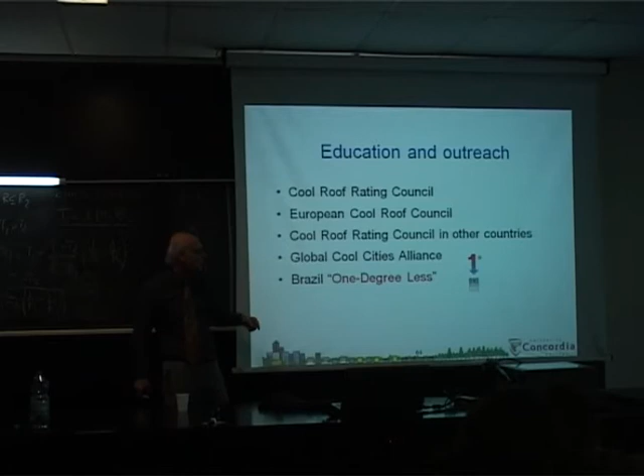So in order to do that, we have a variety of structures and organizations that we have started, such as the Cool Roof Rating Council, the European Cool Roof Council, and Cool Roof Rating Councils in other countries, the Global Cool Cities Alliance, and publicly run programs such as 1 Degree Less.

Why are such things important? I am a customer; a manufacturer comes in and says that my product has a reflectivity of 90%. How in the world can I understand it? I do not have the tool. I need an organization to certify that this information is correct. So the Cool Roof Rating Council measures and rates the performance of the material, so that customers and policymakers can easily apply it.

And there are always some issues about how to bring the manufacturers into this game, which is specific to the locations, and the local leaders must understand that.

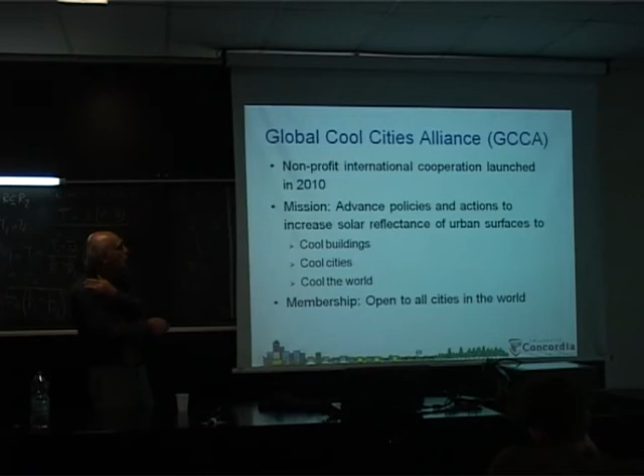The Global Cool Cities Alliance, another organization I started in 2010, is working on the simple idea of how to make cities cool—cool roofs and cool pavements. It would go and offer its services for free and help cities and mayors develop programs. Remember that cities are responsible for 85 to 90% of all the energy used in the world.

At this time, over 55% of the people of the world are living in urban areas. By 2050, that number increases to 75%. So local communities, mayors, and city councils have a lot of authority to make things happen.

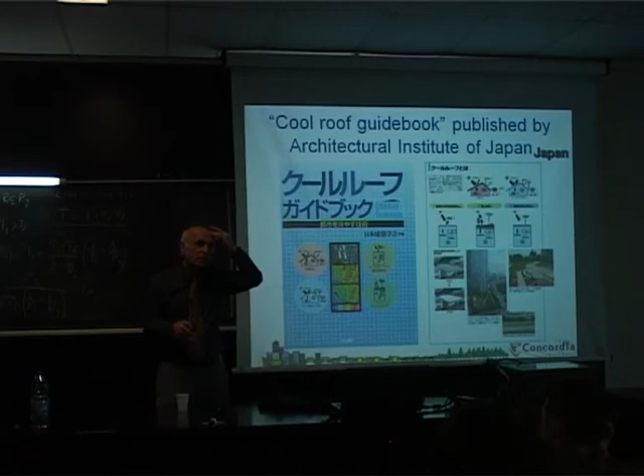Guidebooks. Guidebooks are developed all around the world. The first one was developed by my group almost 30 years ago. Then other nations, such as with the guidebook in Japan, produced information on the minimal level of performance regarding the reflectivity of roofs, pavements, and vegetation. Another institution in Japan is also dealing with that.

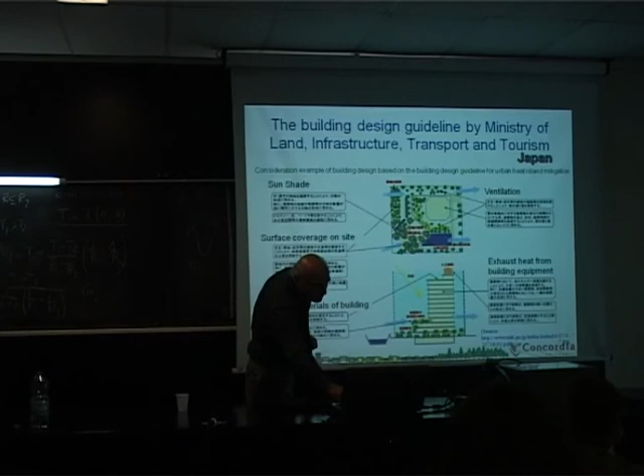Similar guidelines are being produced for Europe, with the leadership of La Rochelle University, about 2 years ago. And the idea is to make sure that this technology is used more often.

So the bottom line is this: if you want comfort in the cities, the programs you have to work on are how to lower the level of heat emission in the city, and how to improve the surface coverage in the urban environment—that would be both walls and roofs, particularly in a dense urban environment.

Improving the urban form—in cities that are being rapidly developed, such as in China, it is easy to design the form of the city or neighborhood from the start. But a practice like that in Italy is impossible, because everything is already established. However, Italy 50 years from now would be different from the Italy of today. If that happens haphazardly in the direction of inefficiency, you would pay for it. Now is the time to get integrated and think: this is where we are, this is where we want to go, and this is the roadway.

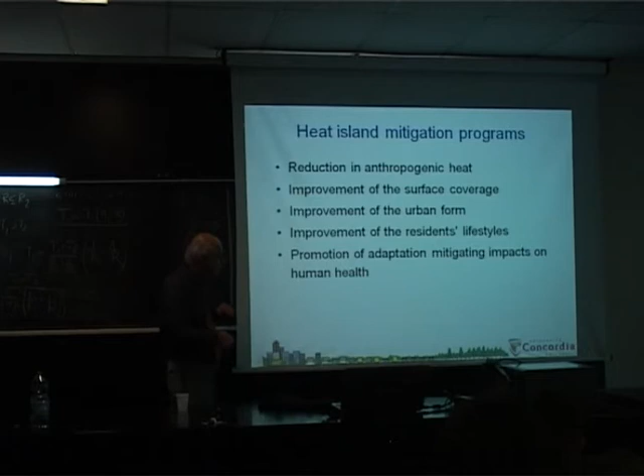And issues like that would apply. Now let me conclude with this slide. This is a repetition of a slide that I gave in Venice in 2014.

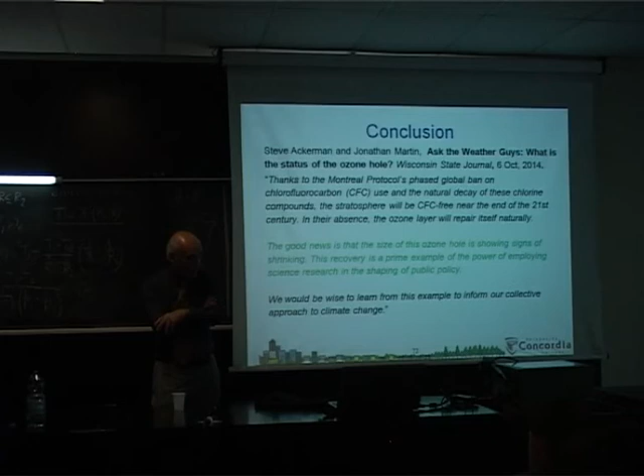At that time, a news article came in showing that the ozone hole in the South Pole was starting to repair itself. You all know that CFCs have the negative ability of destroying ozone. Ozone is a layer that protects the majority of the Earth's surface from extreme UV light. Therefore, with the use of CFCs, the ozone hole in the South Pole was increasing in size.

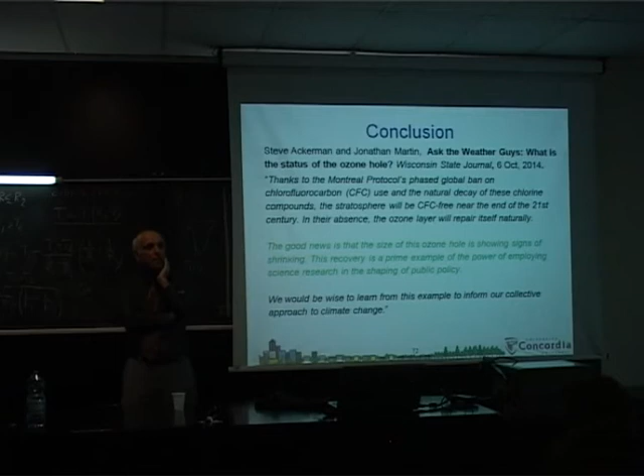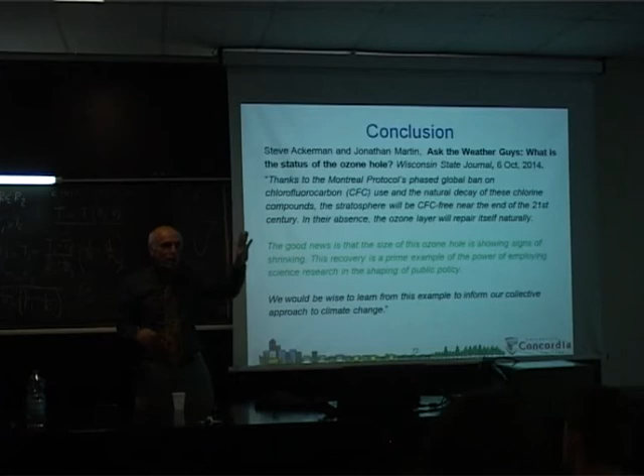In 1987, the Montreal Protocol, a non-committed protocol but led by many nations throughout the world, decided not to use CFCs in their processes. CFCs are mostly used in air conditioning and also in industrial processes such as the manufacture of insulation. So they replaced CFCs within a period of about 10 years with something new. Now, new data has shown that since then, the ozone hole in the South Pole has started to repair itself. It's shrinking in size. Good science, good policy, good results.

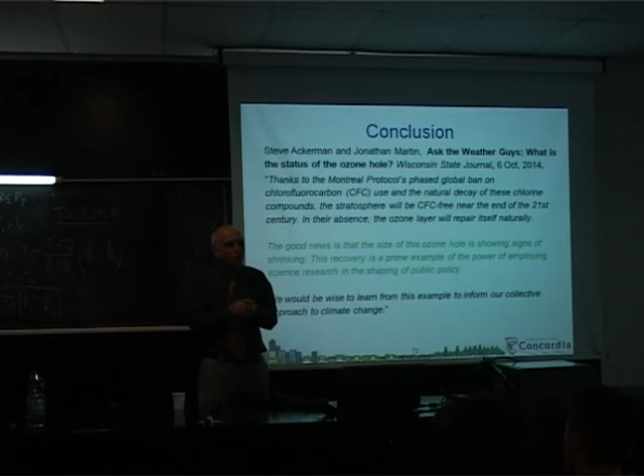Cool roofs save energy, save money, improve comfort, and cool the world. Where is the cool policy, good policy? There are some in some parts of the world, but not others. Good results? Yes, we would get it. So we have to mobilize ourselves in that direction.

Just remember this: if you change the reflectivity of a roof from a dark roof to an aged white roof, that is equivalent to offsetting 10 tons of CO2 for every 100 square meters of area. If every city does that, that is equivalent to offsetting all the cars' emissions for the next 50 years. It doesn't solve the problem of global warming, but it is one of the components that has no cost. It is efficient, saves you money, and you should do it immediately.

It is a no-regret measure. With that, I conclude my comments. I saw no hand during my presentation. That would either mean that I have said everything so crystal clear that everyone understood, or none of you cared. I'd rather believe the first one. With that, I would be happy to answer any question if there is one. Thank you.